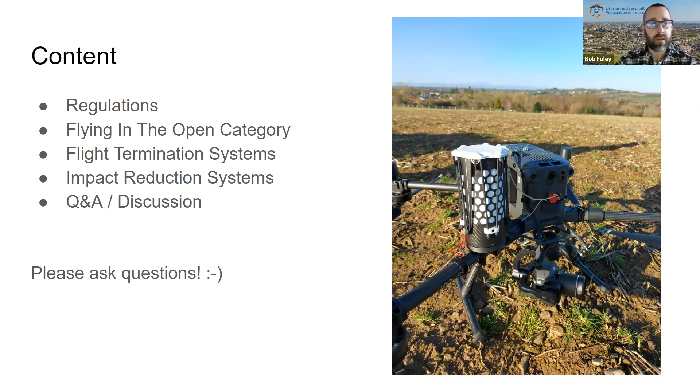So this evening we're going to talk about impact reduction systems and flight termination systems, on behalf of the Unmanned Aircraft Association of Ireland. First, we'll look at what we're going to cover: the regulations around this, flying in the open category and why this is so important for flight termination systems and impact reduction systems. We'll look at both systems, what they are, why they are very different, and how to interpret them. At the end, we'll have a Q&A and discussion, open up the mic to the room, so please ask as many questions as you can.

The big question, if you're new to this, is to understand what impact reduction systems and flight termination systems are, and fundamentally what the difference is. The first can basically be said to be a requirement to stop the aircraft from uncontrolled flight, or terminate its ability to stay aloft. If you have a drone that is uncontrolled, you must be able to, in some way, press a button and it stops flying. It's no longer an aircraft, it's now just a plummeting rock that falls to the ground as fast as it possibly can. That is an absolute requirement within the regulations.

An impact reduction system, on the other hand, more commonly known as a parachute, is a system to reduce the amount of kinetic energy imparted by the drone as it descends. A parachute is a good example of that—it slows the drone down, reducing the energy in it, so when it gets to the ground, it does not have a dangerous amount of energy that will be imparted onto the ground, people, or assets.

Why do we need these systems? In the open category, they are not required, though the new C-class drones coming in may include some of these systems. But in the specific category at the moment, if you need to operate there, you're pretty much required to have at least one or both of those systems.

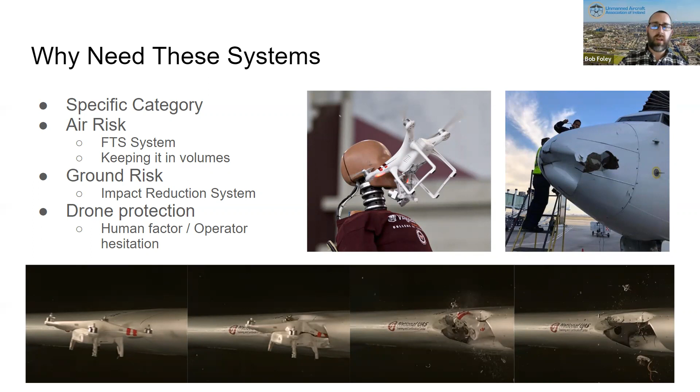The final reason, of course, is we want to protect our drone. Believe it or not, for everybody who's bought expensive drone gear, the regulations don't really care how expensive your drone is—they only care about air risk and ground risk. But we care about the money we spent on our drones, so we want to protect that. One key point is that if we as humans are hesitant to press our flight termination system and watch our drone plummet to the ground, we need to overcome that. We need to trust our systems so that when we press that flight termination button, we know a parachute will deploy and the 20 grand's worth of drone falling from the sky will be protected and fall in a gentler manner, so we won't have a big mess of carbon fiber in front of us.

So let's quickly look at the open category. One of the reasons we're going to look at this is because the specific category is the territory for flight termination systems, parachutes, and whatnot. The open category is where we're almost encouraged these days to fly as much as we can. We want to really make sure we're doing as much as possible in the open category, because it gives us as drone operators the most flexibility to fly with the least amount of restriction in terms of adding gear.

Personally, as a professional drone operator, I think the Mini series is a fantastic drone to use on a professional basis. The only problem with it is, of course, it doesn't look good for the customers. They think, why am I paying you so much money for that teeny tiny drone? But we all know that using a sub 250 gram drone is actually an excellent way of acquiring data in otherwise restrictive airspace.

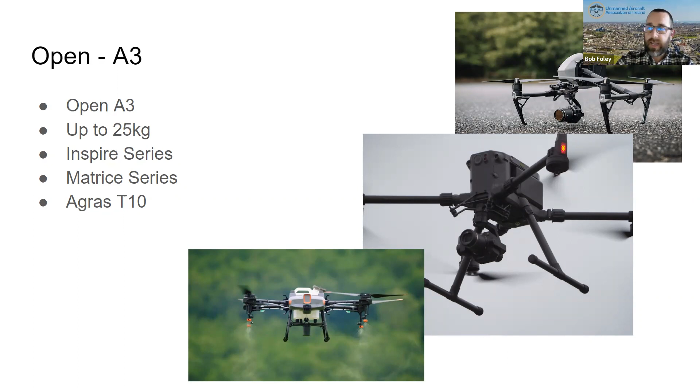I want to turn you over to Julie for a moment now. She's just going to cover a little bit on involved and uninvolved persons, because it's such an important concept to understand when we talk about all of these sorts of things.

Thanks, Bob. And just, I suppose, once in the open category, everything is about the distance and either the size of the drone coupled with the distance that we're keeping from people. When we get into the specific category, we look at the predefined risk assessments, SORA risk assessments, everything else. It's all defined on what's the volume of people on the ground, whether or not they're involved or uninvolved people, and then how far away from them we stay. So it's really important to be clear on what involved people are and what uninvolved people are.

The latest decision from EASA, which was published about 2 months ago now, did give some clarity in the guidance material around involved versus uninvolved people. Basically, an uninvolved person is a person that doesn't take part in the operation at all - they have nothing to do with the operation. They're a random person, but they could potentially be affected by the actual operation itself. But a change in the latest definition of uninvolved persons in the latest edition of the regulation says that a person protected by a shelter - for example, a roof, an overhang, maybe a bus stop - could be considered not affected by the UAS operation.

They're not exposed to the direct risks of the operation if the max takeoff weight of the drone is below 25 kilos, or if you comply with criteria 2 of M1 mitigations for SORA. So that does give a little bit of flexibility and leeway.

There was a discussion at one point about the driver of a car becoming an uninvolved person, so therefore you would have to maintain your minimum distances. That hasn't been brought in from a regulatory point of view, but it is a really good consideration, because you should be keeping ideally the minimum distances from vehicles, particularly if a vehicle is driving down the road, the distraction that a drone could cause an accident.

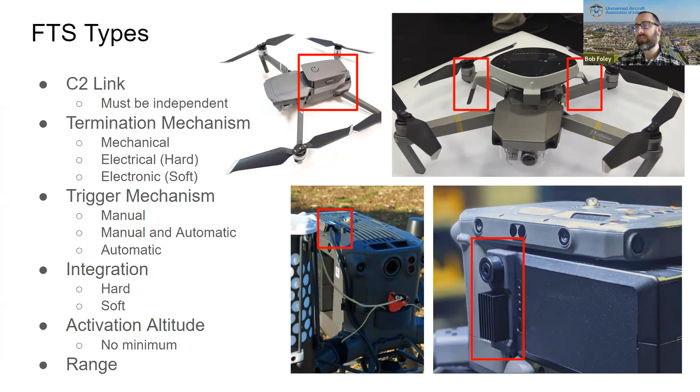In terms of what they actually look like on the aircraft, you can see it all there, but of course in your hand, this is the sort of thing you might have. There's some rather dangerous looking things—I think if you pulled them out in a bank, people would think you're going to blow it up. But there are some rather elegant ones too. This little teeny tiny box here is the entirety of the FTS system that comes from Dronavia, for instance. This monstrosity down here, I don't know why it's that big, but it's another example of, let's say, how we could not design it. These two on the extremes here and here are pretty standard from most companies. But certainly the Dronavia one, in my opinion, is a very neat little system.

Next, we're going to talk about impact reduction systems, or to everybody else, parachutes. Let's look at the details of parachutes and what you want to be thinking about when you're purchasing one, or even just looking at one for your particular systems.

The first thing we can talk about is the deployment mechanisms. There's a bunch of different ones available, and they can roughly be broken down into mechanical and not mechanical. Let's look at them in detail.

The first one is CO2 gas canisters. Anybody who's ever seen a life jacket will be familiar with these. They're used in all manner of things and available all over the place. In most countries in the world you can probably purchase a CO2 gas canister. It's a very standard, purchasable object, and not very dangerous—relatively speaking, it's inert.

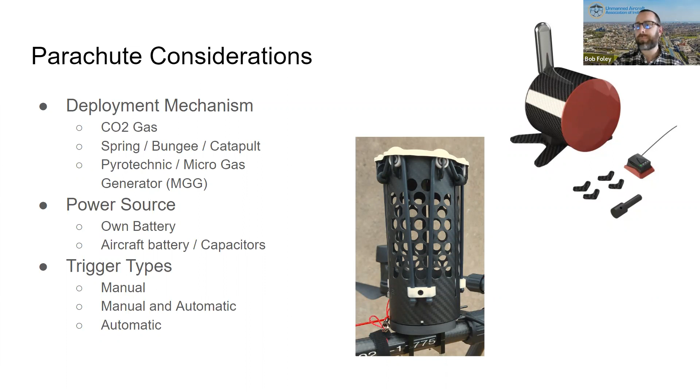This is a big one that I've had discussions with a couple of UAI members on: reusability.

There's some systems where if you purchase it and press the pop button, you have to pay somebody a whole bunch of money to get it repacked, or to send you a whole new parachute pack to install back onto your aircraft. You don't want this thing popping accidentally at 9 o'clock in the morning on your first day of a weeks-long campaign.

So having a good reusable and repackable system is an important consideration when purchasing these. The three kinds we can have are: end user and field repackable - that could mean you actually fold up and repack the parachute, or you just have two parachute modules. If one goes pop, you take it out and put the new one in, and off you go again.

The second one would be service center repackable. That is to say, they're sent to a service center. For instance, one of the guys who supplies parachutes here in Ireland could do it in country, or sort you out on the day, or maybe within 24 hours or something like that.

And then from my perspective, the worst case scenario is OEM only repackable. That is to say, we've got to send this thing to the USA or Canada or Israel to get it fully repacked and certified, and we've got to spend money doing that in terms of packaging and paying for the actual repack itself. So from my perspective, this would be the least desirable design of reusable systems.

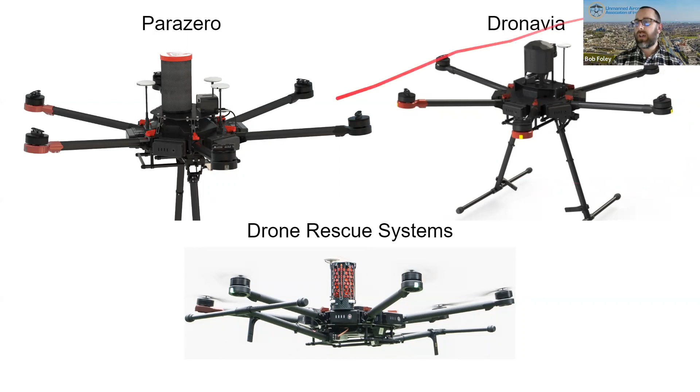In terms of what's available, I'm going to quickly shoot through a whole bunch of stuff, basically showing you how they integrate on the aircraft and what they look like with your particular aircraft, just to give you an idea of what's out there. So this is the M600 range - roughly speaking what's available from ParaZero, ParaZero there, Dronavia there, and DRS down here.

Moving on, we've got the M300 systems - I think a very common aircraft these days. The DRS system there sitting out in the arm. This is the Dronavia system - there's two different systems available. One goes on the top mount, but this system can also go underneath as far as I can tell. They also do a twin parachute system which attaches on the leg areas, so it doesn't occupy the top or bottom payload points.

More M300 systems - this is from ParaZero, that one uses an MGG, just to be aware. This is the AVSS system from Canada, uses springs, and even though it seems like it's on top, it's not actually on the top payload point. Then the Indemnis system - I don't know a massive amount about that one. It's relatively new as far as I can tell, but they occupy a location on the side. I'd have to remember if they have an FTS system associated with their unit.

Moving on to the M200 series - again, Dronavia cover that, ParaZero cover it, and DRS cover it. Moving on to the Inspire series, Fruity Chutes certainly do one - you'll see this labeled Skycat, but that's a sub-brand of Fruity Chutes from what I can tell. Dronavia do one and Indemnis do one also. You can see three very different integration models: Dronavia on either side, Fruity Chutes vertically on one side, and Indemnis horizontally on one side. Different strategies there.

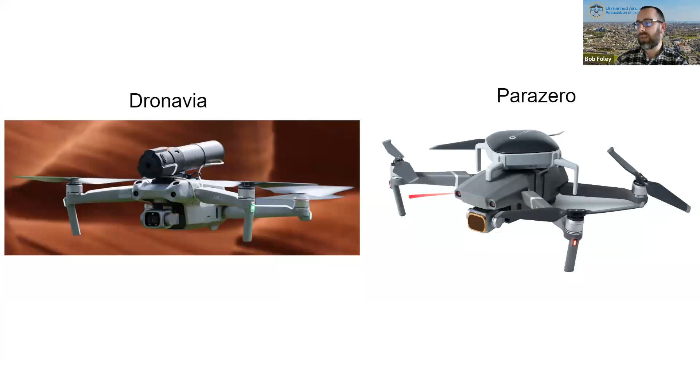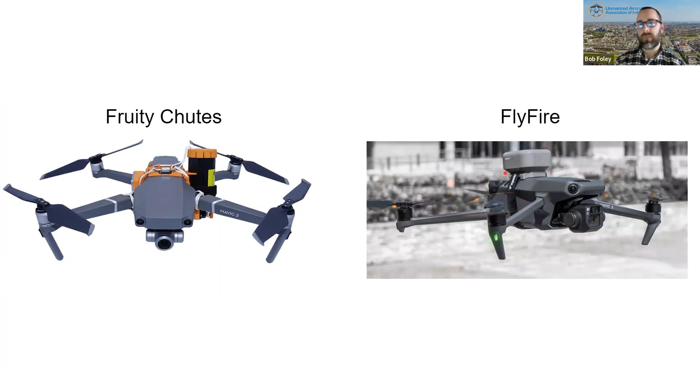So that's AVSS, the Canadian brand, if you remember. Fruity Chutes have a system that looks like that, and Flyfire, from China, have a system like that. Again, just to remind you, this system, for instance, is only a parachute - no good for a specific category because there's no C2 link independent flight termination system. That's the key element there.

This is an important one to consider. I'm going to give you some personal recommendations here. These are not on behalf of the UAI, just my personal recommendations. I would try to purchase a drone in Europe if I could, and the reason is simple: drones in Europe are built around the regulations in Europe, drones in America are built around the regulations in America, and so on.

For instance, the Austrian crowd, DRS, the French crowd, Dronavia, the Israelis less so, but they do have a lot of very Europe-compatible drone parachuting and FTS systems. So I personally would stick to one of the top 3 there if I was looking for a system. I would be looking at one of these 3 guys.

Most of them all have representation in Ireland. They can also all be dealt with directly, I'm sure, but they will just tell you to go to the local representative. In case you're unaware of who that is, you need to be talking to Shane in Munster Drone Services, Mark in Unmanned Solutions, and Damien in DroneWorks Ireland. Those are the 3 people in Ireland, as far as I can tell, and I'm very much open to correction, who will be able to advise and supply you with systems like those.

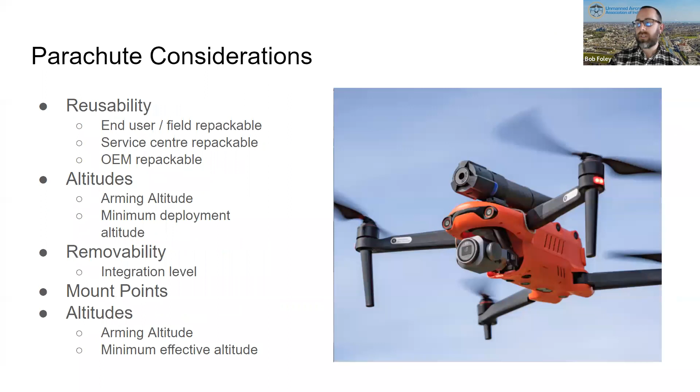I can tell you this, if you're looking at something for an M300 system, for instance, something like these, you're talking anywhere between 2,000 and 4,000 euros. But if any of the distributors in Ireland are on the channel, I'd certainly welcome their input on that if my numbers are inaccurate.

On the smaller systems, I remember having a talk with the guys down in Israel with Parazero, and one of the sentences I said was, why would I buy a system that costs more than the drone it's designed to protect? They promptly sent me an email a week later with a system that was half the price, for one of the smaller units, I think one of the Mavic systems. I think they're coming in around 1,500, maybe 1,000 euros, but the guys in Ireland who distribute these systems will certainly tell you exactly how much they cost.

Thank you, Bob. That means in many cases, the retrieval system is more expensive than the drone it's protecting, as you said. Indeed, there's a small but not unnoticeable element of box ticking with a lot of these systems, and that's just a cost of putting a drone in the air in the current regulatory environment in Ireland, and that's just the way of it.

But yes. And the other question, Bob, is what weight are they proportionate to, if you like, the gross takeoff weight of the drone? I know there's no absolute answer to that, but just roughly.

I can't say for a lot of the other ones, but I can say on the DRS system, this is 400 and something grams relative to an MTOM of 9 kilograms for the actual drone itself. With the standard payload, you're usually around 7 with this particular drone, so you're adding 400 more grams to that by installing this.

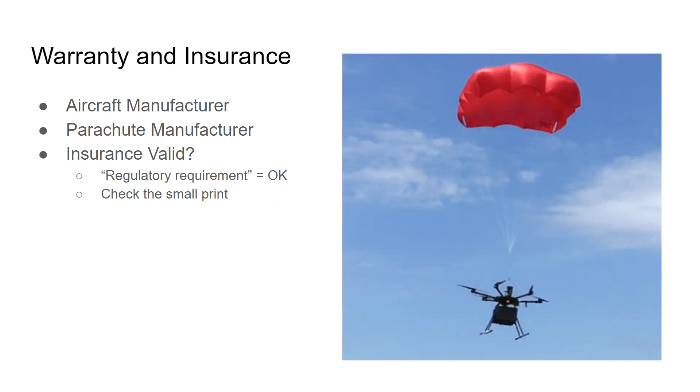And then one other thing was on your picture of the Phantoms, just because the Phantom 4 RTK is so popular, the Parazero won't go on it because of the GNSS module on top. You will have to go with something like the Dronavia or the Fruity Chutes. They're very popular with surveyors, obviously, so just something to be conscious of.

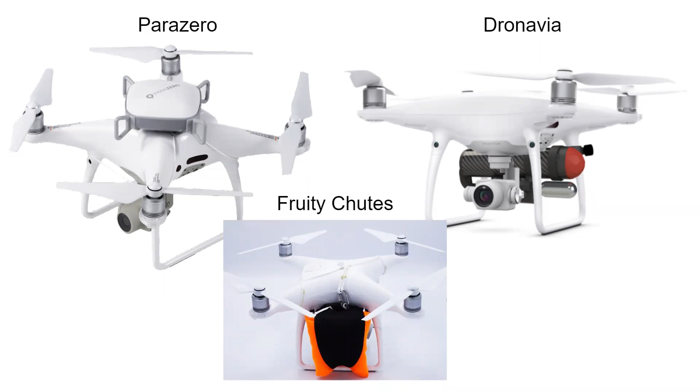And one last thing, just on the weights, the Dronavia single is about 460 or something, and the double is 7, including the FTS, 780 or something like that in terms of weight. That single one, the one consideration is it's bolted onto the drone. It looks in that picture like it just screws on and screws off, but it actually doesn't, and that's a mistake I made. There's cables coming out of it that you can't see in that picture that are physically attached under screws on the arm mounts. So if it's on, it's staying on. You're not going to be taking that on and off in the field.

So just something for people to consider. That's an excellent point. Thank you, Fergal.

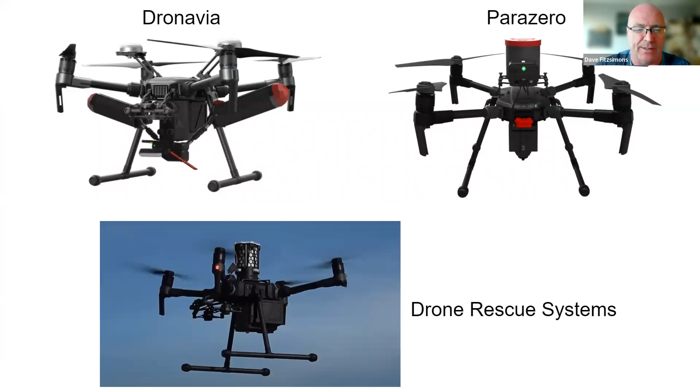I have a couple of queries about the flight characteristics of attaching some of these flight termination systems to one leg or one arm of your drone, considering it weighs something like - I think you have the DJI Matrice 300 there with the DRS system on it. So you've attached a 400-gram weight to one leg. Ideally, the other props on the opposite side would have to account for the aerodynamics and flight characteristics of this. So this is going to run the battery down, I would have thought, on certain systems, maybe not them all, but deteriorate - I can answer that quite easily.

The best way to consider any of these systems when they're installed is it's like you've got a wind or a breeze from that direction - that's all the drone actually feels. So the drone isn't thinking, wow, that arm is heavy. All the drone is feeling is, I've got a slight tilt in that direction and I compensate for it. With regard to battery life, certainly adding extra mass to any multi-rotor drone is going to reduce battery life - that's just basic physics, nothing we can do about that. Whether it's a significant reduction, personally, I don't think it's massive. I'm going to throw out numbers completely unqualified and say maybe 10 to 20%, but it's certainly not something that has affected me massively in the field, and not something I'm overly concerned about. I hope that answers your question.

Yeah, it does to a certain extent. Yeah, thanks. Great. Mike.

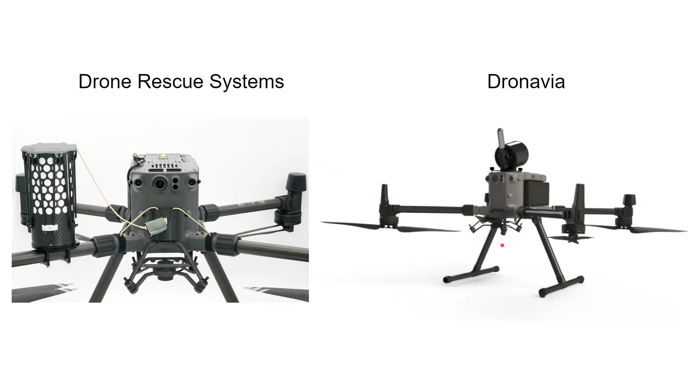Yes, hi. Just a question. Unfortunately, where I'm based I'm under a control zone, so I have to go in the specific category one way or the other. And I fly an Inspire 2. So I've managed to locate and have on order since January a parachute system for that, which is the Skycat one, which also has a flight termination system that fortunately doesn't have to be soldered in, but is plugged in. But I haven't received it yet.

They're changing the system apparently because of a delay with components or something like that, so I'm hoping to have it shortly. I haven't been able to fly since January because I haven't got it yet. But the question is, if the package itself puts your drone at or slightly above the maximum takeoff weight, what is the legal and insurance situation? I don't know what the weight will be when it's finished, but I have a suspicion it'll be close to the Inspire's max takeoff weight of 4 kg, so it could end up at 4.01 or something like that.

Yeah, I can jump in for part of that. Most of these drones, the manufacturers publish a max takeoff weight. Take the smaller drones, leave out the Inspire for a second - they have a standard setup and don't have interchangeable payloads, so by attaching a parachute to them, you're automatically going above their max takeoff weight. From the insurance company's point of view, they are accepting that, like Bob said, because you've gone slightly above.

Yeah, you're going to develop more wear and tear on the drone, the motors are going to burn out, and so on. But the insurance companies are accepting that as an acceptable risk on the basis that this is a regulatory requirement to attach them to it. So you're covered from an insurance point of view on that, even though you are probably operating your drone above its max takeoff weight, above the manufacturer's limitations.

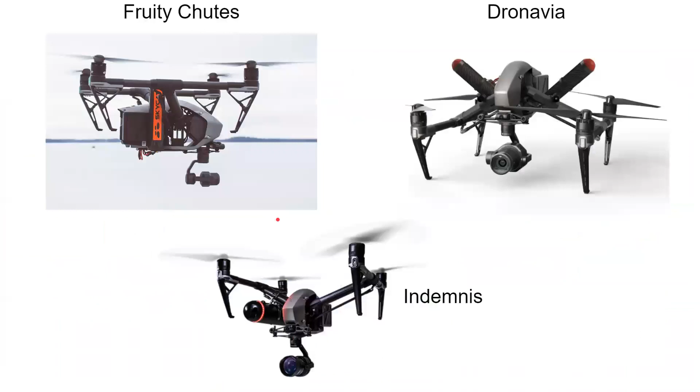The button is lovely and neat, but when you actually look at where it's mounted, I personally made the decision to get a second button that gets wired in, in case of accidental activation. Where you generally mount it is kind of on the controller, and to me it would be quite easy to accidentally drop a thumb on it. So I got the second button, I think it's €90, and it just gets wired in. You have to push the two of them together, so it's just an extra level of safety that you're not going to just fire it.

That's a very interesting one, actually, because I think most of the other systems are 2-button activation. So you're saying on the Dronavia systems, the default product is single button activation? Yeah, it's just a duplicate of that little button, and there's a wire that runs between the two of them, but I just felt safer having the second one. Indeed. Okay, very good, thank you.

I see, Richard, you have your hand up there again. I'm not sure whether your hand is still up from before. Or is that? Okay, perfect. And Dave? Yeah, I just have another quick one there for you.

We're looking to buy another Mavic for the university. Is there anybody in the market selling them with the FTS built on already? Or are we having to buy these separately?

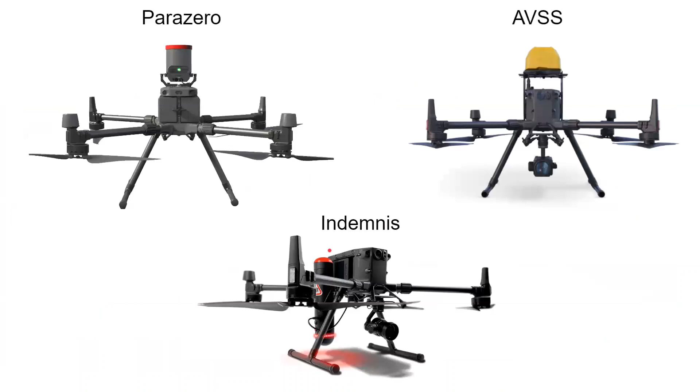Just one comment on the Mavics. The new Mavic 3 obviously has a far better battery position. The old one, you have to power down the whole parachute to change the battery, and that's something to consider. Whereas the new one, it ejects out the back, because they all basically mount on top of the battery. So if you do have a Mavic 2, consider that you will have to shut it down.

I don't know if you try to take that off with the system powered up, whether it's going to fire in your hand. I don't know, I wouldn't like to try it, but just something to consider.

Interestingly, you say that, Fergal. The AVSS system put their strapping system around the back now for some reason, which I cannot fathom at all. Oh, really? Yeah, they seem to have basically said, oh, we need to retain that particular design flaw in their new system. So yeah, but I think there are other manufacturers coming out with Mavic 3 systems that will go over the top, which means that there won't be that issue, which is a great design feature.

That's great, that's a great point, Fergal. And it just sparks something else off in my mind - one of the requirements of a flight termination system is that it's tested on the ground prior to flight. So just make sure that if your parachute does arm at 0 and you're testing your flight termination system, that it doesn't activate the parachute.

Some of them have a false cylinder that you put in, that you attach into the parachute. Some of them you don't arm the parachute until after you've tested, but it is a requirement to test the flight termination system on the ground prior to every flight. So just be aware of that and don't activate your parachute accidentally, or you very much rely on Bob's advice that you can repackage yourself. So just be aware of that too.

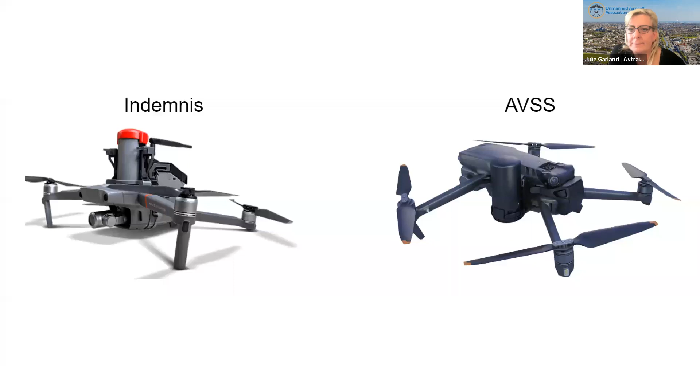Indeed. Yeah, just the ASTM ones, as far as I know, are required to go back to either the manufacturer or an authorized service center to maintain the ASTM certification. So if you are buying one of them, you will have to send it back. You definitely can't self-pack those ones. And obviously they're generally American-based systems, so.

Yeah, this market seems to be very much opening up with the European requirements. So I would hope that over the next short period of time, we'll have more choice on this side of the water as well, and also the standards actually published. I know EUROCAE here are doing some great work on the standards around these. We should have those hopefully fairly soon, which will give us a European standard, which even if it's not an EASA standard, would still be preferable to the ASTM. I think the EUROCAE standard is really going to be based on the ASTM.

So I think somebody's asking who the main drone suppliers are. Just very quickly: Munster Drone Services, that's Shane; Unmanned Solutions, that's Mark; and Drone Works Ireland, that's Damien. All three of those guys will be able to help you out.